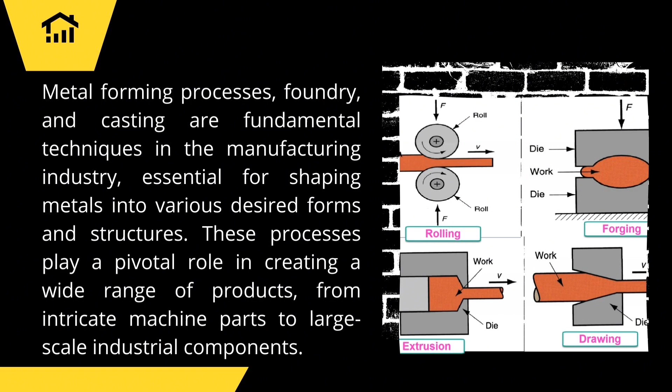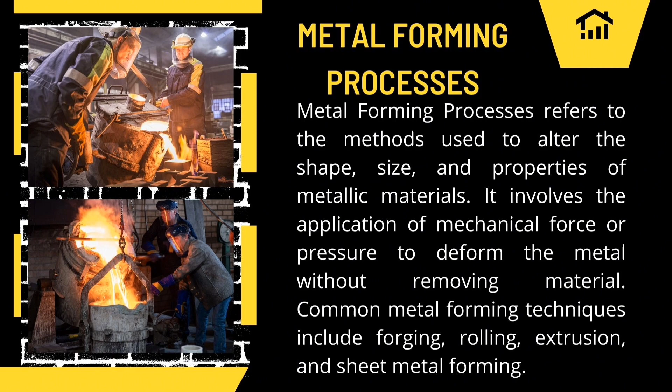Metal forming processes manipulate metal to change its size and shape without removing any material. Forging, rolling, extrusion, and sheet metal forming are some of the common metal forming techniques used for this purpose, and they all have different advantages depending on the desired outcome.

Foundries play an important role in the metal forming process, allowing for the production of intricate shapes and components from molten metal through casting.

Casting involves melting metals and pouring them into a mold, creating a desired shape. This process is used to make large components such as engine blocks, pipes, as well as intricate sculptures. Thus, foundries are essential for the production of complex and large metal parts.

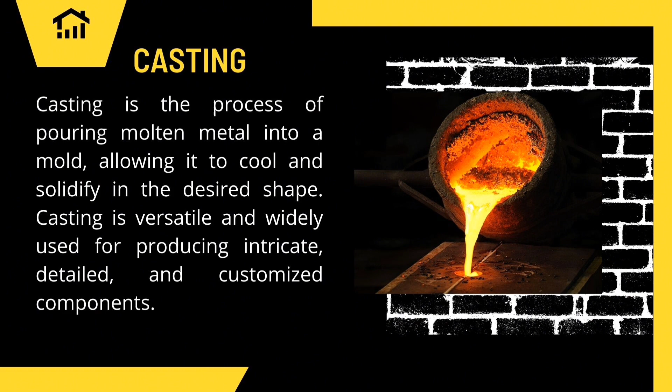Casting is a process of forming complex shapes by pouring molten metals into a mold and allowing it to cool and solidify. It is highly versatile and can be used to create intricate components with custom designs. Metal forming processes and foundry are all related processes for this purpose.

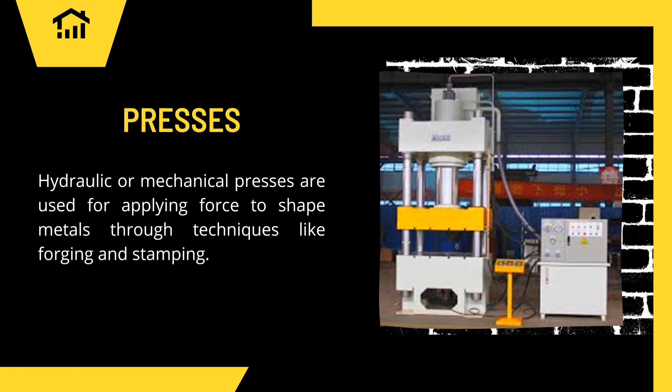Next will be the rolling mills. Rolling mills are used to reduce the thickness and alter the shape of metal sheets or plates. This is done by passing them between a set of rolls with different cross sections. The process can be cold or hot, and pressure can be applied to the rolls to ensure accurate results. The size and number of rolls vary depending on the thickness and the type of material. Rolling mills are ideal for forming complex shapes and are used in a variety of industries.

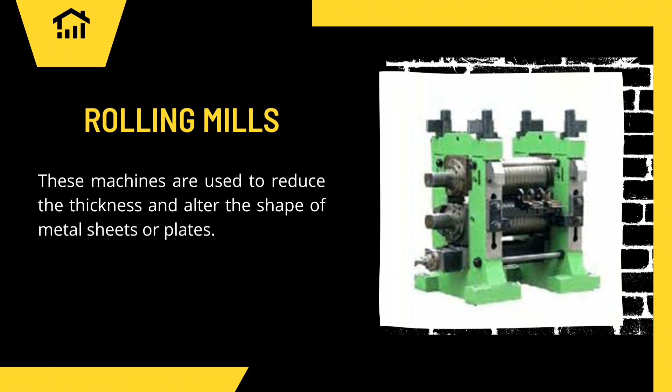Another tool and equipment will be the hammer and anvil. Hand tools like hammers and anvils are used in blacksmithing and manual forging processes. Forging is a process where metal is heated and shaped using physical force. This technique has been used for centuries to shape and form metals into complex shapes.

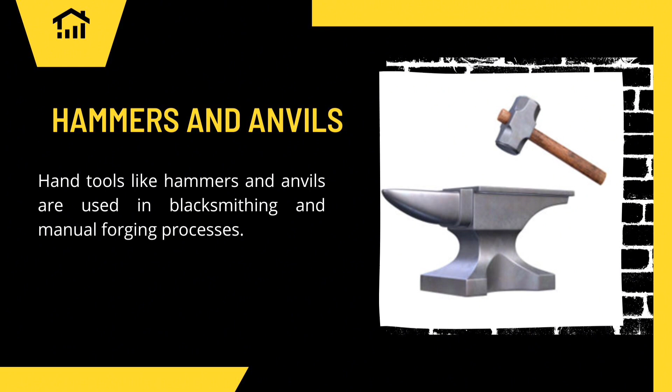Die sets are an essential part of the metal forming and casting process. They include molds and punches used in processes like extrusion and die cutting, and are designed to create a specific shape with precision. The design of die sets can vary depending on the intended use. Manufacturers must consider factors like metal composition and strength when selecting the correct die set for the job.

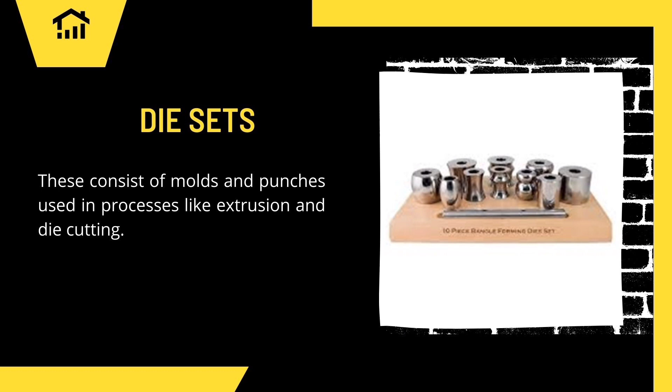Shears are widely utilized for cutting metal sheets and plates into desirable forms. Their capability to conduct precise cutting with controlled motion in a cyclic procedure, combined with their short setup time and capability to replicate exact cuts, make them suitable for cutting both large components and thin materials. Shears are an essential tool in metal forming processes, foundry, and casting works, as well as many other manufacturing industries.

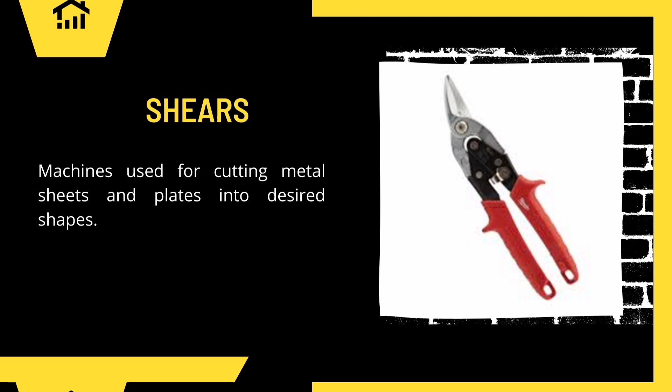Swaging machines are a type of metal forming process used to reduce or shape the end of a metal tube or rod. It involves passing the metal tube or rod through a die, which shapes the metal in the process. This technique is widely used in automotive, aerospace, and medical industries for producing parts. Swaging machines are crucial for many manufacturing operations as they enable accurate shaping and manipulation of materials.

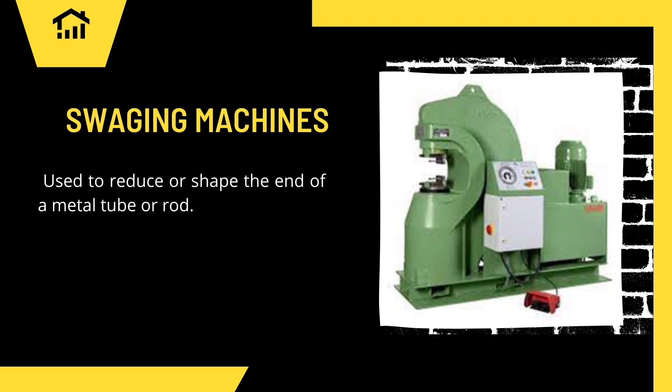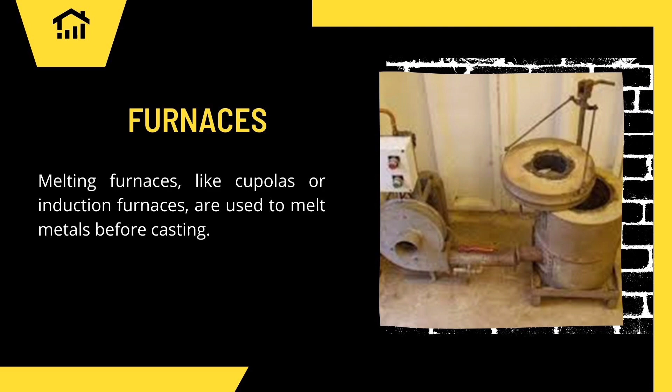Furnaces are a great option for metal forming processes. Through melting, casting, or alloying, these furnaces can help to achieve various shapes and sizes. Cupolas and induction furnaces are two examples of melting furnaces used to melt metal alloy for casting, thus allowing for the production of a range of items for the manufacturing sector.

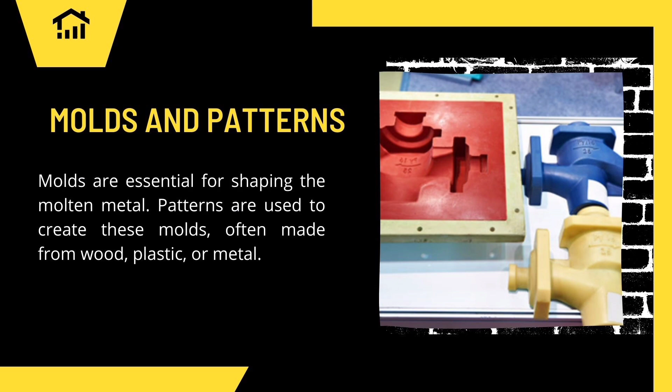Molds are essential for metal forming, made out of various materials such as wood, plastic, or metal. Depending on the metal type, different patterns are used to craft the molds. This mold serves as the basis for molten metal to be formed into the desired shape.

Crucibles are necessary for transporting and pouring molten metal in metal forming processes. Many metals used in this process are heat resistant, making it important to have an appropriate container to efficiently transport the molten metal. Different materials can be used to make crucibles, including graphite, clay, metal, or fiber-lined ceramic, which can all help protect the molten metal during its journey.

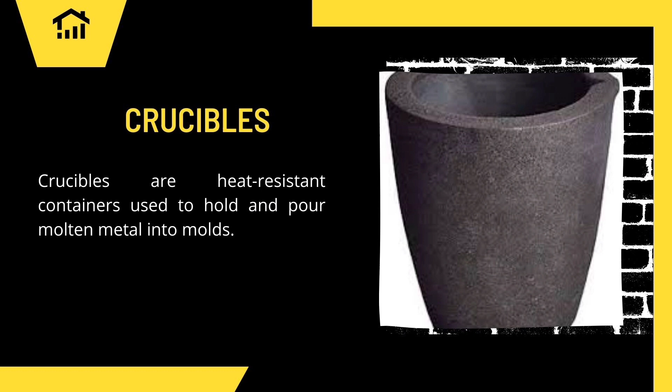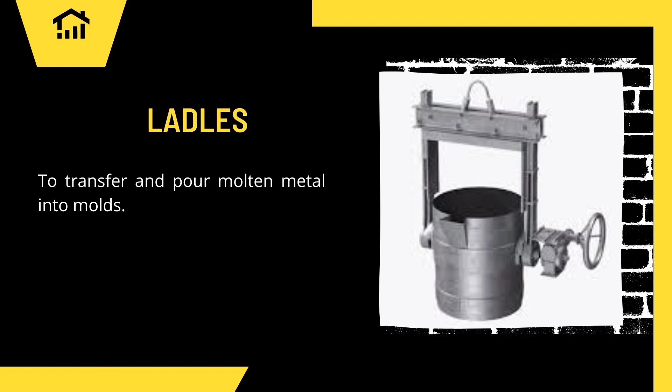Ladles are an essential tool in the process of transferring and pouring molten metal into molds. Metal is heated in a furnace until molten and then put into the ladle. The ladle is then connected to a crane or hoist and is used to pour the molten metal into the molds. For precision and safety in pouring, ladles are typically designed with a spout, which enables a controlled, even flow of molten materials to ensure that it safely reaches its destination.

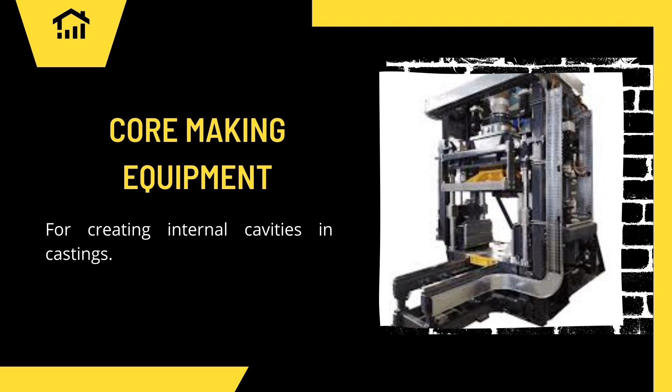Core making equipment is utilized to generate internal cavities in casting. It uses a high pressure, grit-filled air blast to give the mold its desired form. This ensures that the casting holds a steady shape and weight. After the core is produced, it can be used as a support for casting other materials such as sand, wax, and other components. Core making equipment is an outstanding instrument for crafting intricate and precise patterns for casting.

Shakeout equipment is designed to separate the casting from the mold materials after the casting has hardened. It carries out a speedy and efficient process of extracting sand or other mold materials from casting. This ensures the highest quality of product is achieved and lowers the possibility of any damage to the casting upon being taken out.

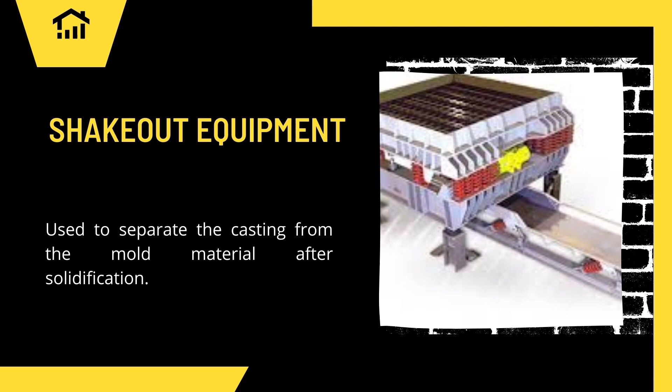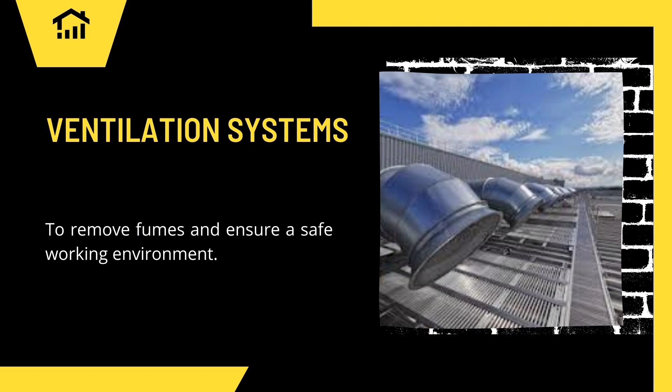Ventilation systems are key to successful metal forming and foundry processes. These systems provide airflow that helps to eliminate fumes and particulates, improving safety and working conditions. They also regulate temperatures and control humidity levels, as well as boosting employee productivity and helping with quality control. Ventilation systems are essential for safe and efficient handling of materials.

When it comes to metal forming processes, there are a variety of tools available for cleaning castings such as grinders, sandblasters, and shot blasting machines. These tools allow us to remove excess materials and create a smooth finish on the castings.

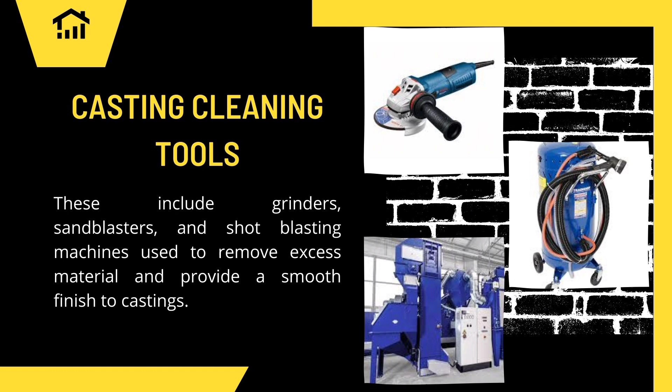We have discussed metal forming processes, foundry, and casting in this presentation. I appreciate you all for taking time to listen.